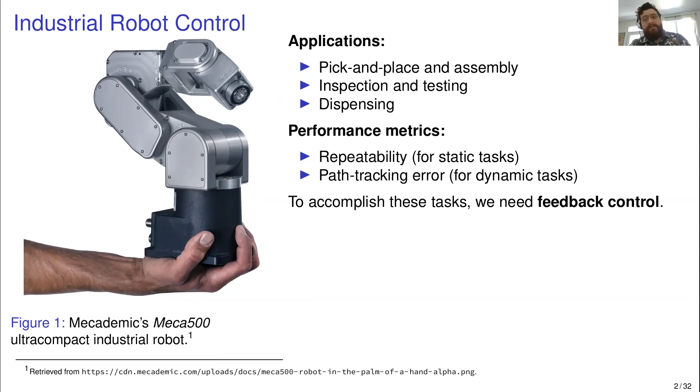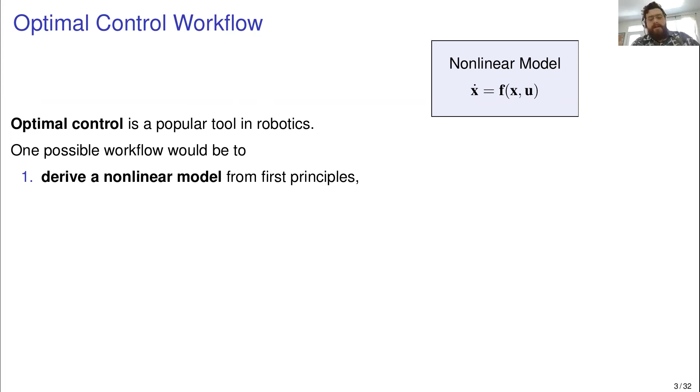So one way to do feedback control that's a very popular tool in robotics is optimal control. So in this workflow, you start with often a nonlinear model that you've derived from first principles like Newton-Euler or Lagrangian mechanics. And to actually use these tools, you need to linearize the model. So you choose an equilibrium point and you find a linear model that's valid near that equilibrium point. This is a local approximation.

And then once you have that linear model, using your A and B matrices, you can synthesize a controller by posing an optimization problem. So you would say your criteria would be, I want very low tracking error, and you want to also not overuse your control inputs. So by balancing the control effort and the path tracking error, you end up with a controller that's in this case optimal for the linearized model, but not necessarily optimal for that nonlinear model.

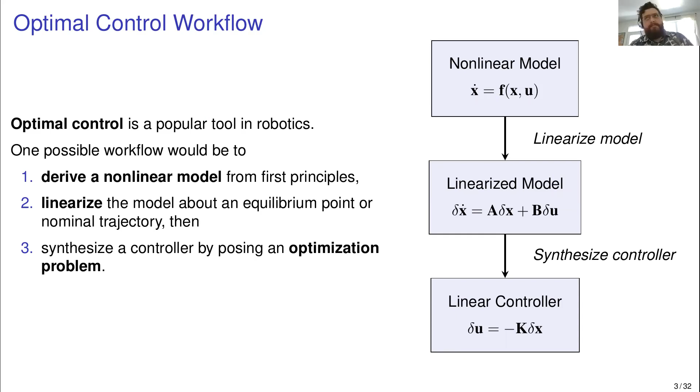So this approach has some advantages and disadvantages like everything, some trade-offs. The nice thing is that it leverages our knowledge of the dynamics. In a lot of cases, we do know a lot about how the robot behaves. So we want to use that information instead of just randomly tuning PID gains. It's also really systematic, it's easy to tune, and it helps us evaluate trade-offs.

So if you're hand tuning a PID, you might end up accidentally creating an unstable controller or making a strictly worse controller. But in this case, with optimal control, you're kind of staying at the interesting trade-offs between control effort and error. And of course, since this is a super old, well-studied field, there's lots of extensions to handle nonlinearities, either with robust control where you can treat the nonlinearities as disturbances, or with gain scheduling to do different optimal controllers at different points.

But the disadvantage here is that you rely on your knowledge of the dynamics. So if you have a bad model, you'll have a bad controller. So you could end up in a situation where just the model parameters are unknown, like inertias or damping coefficients, or you could end up with a situation like some complicated friction where the entire form of the model is unknown.

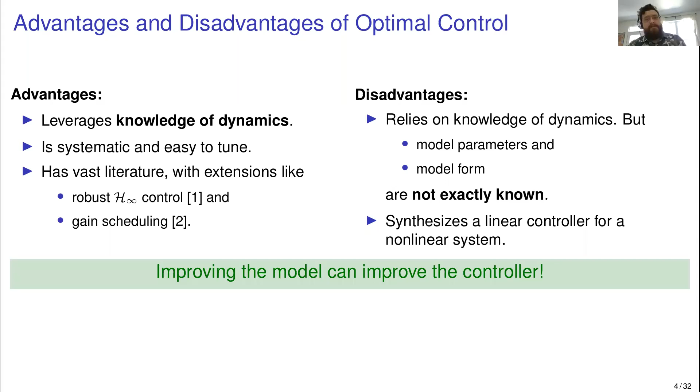The other thing here is that this synthesizes a linear controller for a nonlinear system. And so we may be leaving some performance on the table there when introducing a nonlinearity in the controller could potentially improve the performance. But the takeaway here is that if you improve the model, you can improve the controller. And so this is why we're going to start to care about using the Koopman operator to model a robot.

So in the case of the Mecademic robot, you have a robot on your desk and you want to make sure that this model that you have matches a real robot. You could, for example, just make reasonable assumptions about all the model parameters. You could assume you know the inertias from the CAD model, take damping coefficients of the gearbox from the datasheet, or you could further refine that by doing parametric system identification. So you could run the robot in a variety of poses and in a variety of paths and try and identify those parameters from data.

But if you don't have a model for some parts of it, or if for some reason you don't want to use that model, maybe it's too slow to evaluate, you could learn a complete model non-parametrically. So fit the entire thing with a neural network or a Gaussian process, for example. But there are some limitations to all of these approaches, and it's that they all learn nonlinear models, and you'll need to linearize them if you want to use optimal control. And of course, you'll still end up with a linear controller for this nonlinear system.

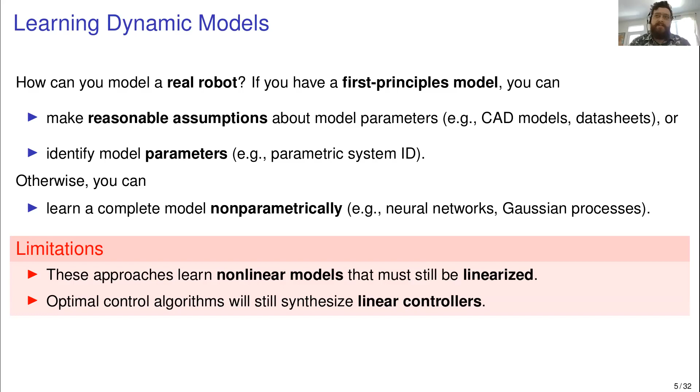And another side note is also that some of these methods, like neural networks and GPs, are really great for learning functions, but really what we want to learn here is a differential equation. And so finding a machine learning method that's kind of tuned to learning differential equations is a very interesting topic.

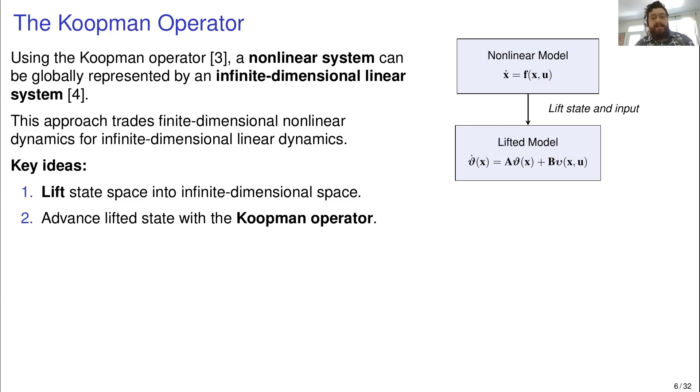So I'll start now by finally introducing the Koopman operator here. With the Koopman operator, a nonlinear system can be globally represented by an infinite dimensional linear system. So what we're doing here is we're trading finite dimensional nonlinear dynamics for infinite dimensional linear dynamics. So the kind of workflow that it might take for control here is that you lift the state space into an infinite dimensional space. You do this huge transformation, you take all kinds of nonlinear functions and you transform the state into an infinite dimensional state. The Koopman operator is responsible for basically acting like the state space model. It transitions the lifted states to the next lifted states.

Finally, you can design a controller in the lifted space that's linear using optimal control tools, and then retract, so recover that control input from the lifted controller into a nonlinear controller. So what you end up doing here is designing an optimal linear controller in the lifted space, and then bringing that back down to the original space where it's a nonlinear controller.

But I'm sure some of you are wondering what I'm talking about with this infinite dimensional system. You can't have that on a computer. You can't really work with that. So the key thing here is that we're going to use data-driven methods to approximate a finite dimensional Koopman operator. So instead of an infinite number of lifting functions, we'll maybe take 50 or 100 and see how close we can get.

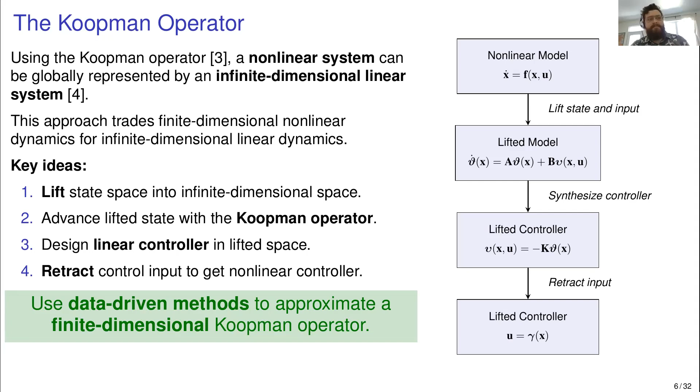So this is, warning you now, the heaviest slide in the presentation, the most mathematical, but this describes the very underlying theory of what's happening with the Koopman operator. And then we'll go into how to approximate it with data-driven methods. So if you consider this

nonlinear process, x_{k+1} = f(x_k) in equation 4, what we can do is take these lifting functions, psi, and basically any function that takes the state and spits out a scalar is a lifting function. So sine, cosine, squared, anything that gives you a scalar and takes in the state is a lifting function. And what the Koopman operator itself does is it takes these lifting functions as input and returns functions as output. So what you see in equation 5 is the Koopman operator takes the lifting function as an input.

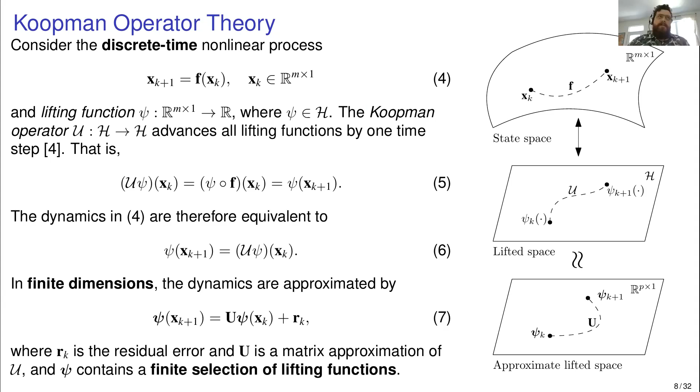Since we want to do control, we care a lot about the inputs. So we have to modify the Koopman operator just a little bit to account for that. We care to predict the states in the future, but we don't care to predict the inputs. We know the inputs already. We don't want to propagate them forward. So that's why there's the 0 here in equation 8.

The next trick that we do is we partition the lifting functions into 2 parts. The first part, theta, only depends on the state, and the second part, upsilon, can depend on the input. So we're splitting up our lifted states from our lifted inputs. And when we substitute that back into the same equation 7 from the previous slide, you see that you recover the state space over here. You have theta at the next time step equals A times theta at this time step plus B times upsilon. So this is the lifted state space equation that we get by breaking apart the Koopman matrix. So this is what we can use, this A and B, to design a linear quadratic regulator, for example.

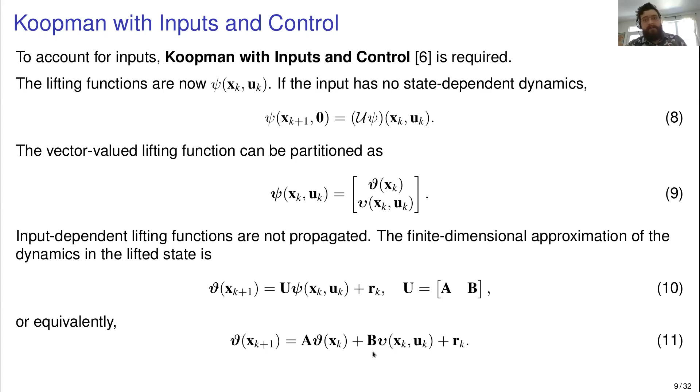So given that A and B that you find through linear regression that are both inside the U, you can do a state feedback controller in the lifted space. In 16, since theta contains all these nonlinear terms, this is actually a nonlinear controller. So this reveals the potential to do nonlinear optimal control, given that you've picked your lifting functions correctly.

On the left, you see a simple toy example with the Van der Pol oscillator. There, the orange controller is designed using a linearization of the Van der Pol oscillator, and the green one is a Koopman controller that's based on Hermite polynomials as lifting functions. So you can see the Koopman controller takes a qualitatively different path to 0 and also achieves a 20% lower LQR cost. So there's something here. If you do everything correctly, you can do some kind of nonlinear optimal control.

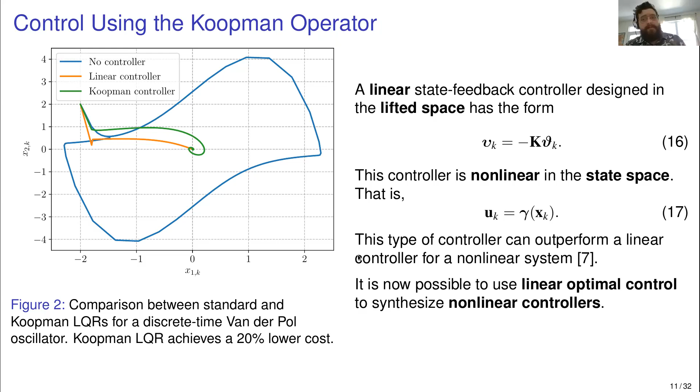I'm going to summarize the Koopman workflow again, and then we'll get into some issues and some kind of open research problems with the Koopman operator and some of the work that Professor Forbes and I have done. So the first step is, of course, to choose your lifting functions. Well, the dream is to be able to pick them as domain specific, pick things that you think will enter into your model, but it's often not quite that simple.

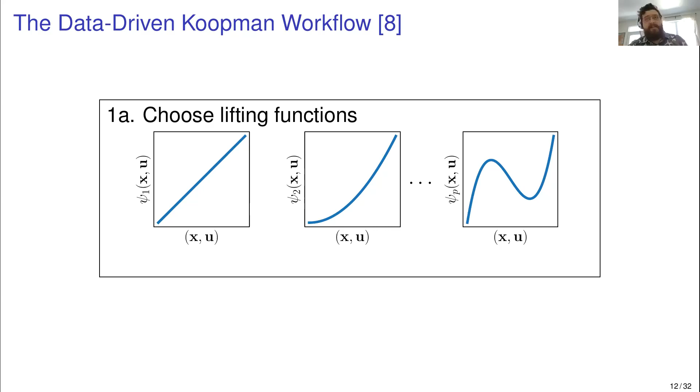You could also choose standard basis functions, like I mentioned, Hermite polynomials, monomials, sine, cosine, Fourier basis. And also a very interesting one is using time delays, so augmenting the state with shifted versions of itself. So once you have this choice of lifting functions, you also have to collect data snapshots from either a simulation or from running your robot over a bunch of trials.

You then can approximate the Koopman operator by applying all of your lifting functions to your data snapshots and solving a linear regression problem. You then have to test the predictive performance. You have to see how well or how poorly the approximated Koopman operator works. And then the problem is really that there's a manual loop here where you have to go back and refine your lifting functions to actually potentially achieve the best performance. You may not have used enough of them. You may have picked the wrong set, and so on. So there's this open problem for actually picking the lifting functions.

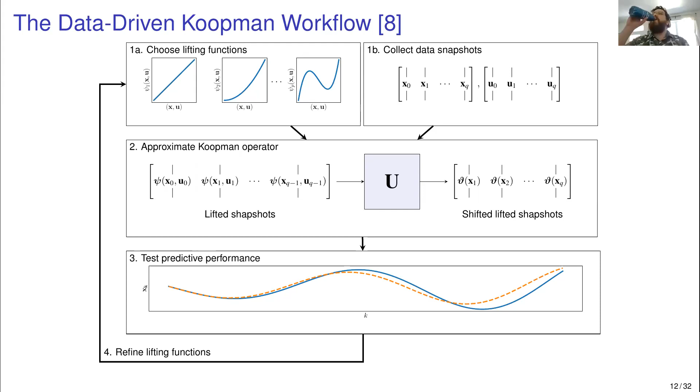So as I mentioned, choosing lifting functions is an open research problem. There's no right or wrong way to do it, or maybe there's plenty of wrong ways to do it. But the Koopman regression problem is actually very numerically challenging. Even though I said it's a simple least squares problem, it scales very badly with the number of lifting functions, and it can actually yield unstable or numerically problematic Koopman operators from situations that you would think are stable.

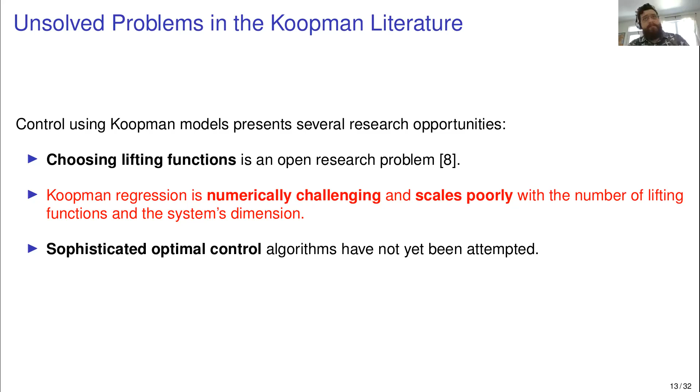There's been some interesting work doing LQR and model predictive control with the Koopman operator, but there's still a lot of interesting linear control to apply here. But the thing I'm going to talk about is the numerical challenges, because personally, that's the first roadblock I hit when trying to work with the Koopman operator. So when a lot of lifting functions are used, the least squares problem gives you an unstable Koopman operator, which is a problem because if you know your robot is asymptotically stable or it has stable dynamics, you don't want an unstable model for it.

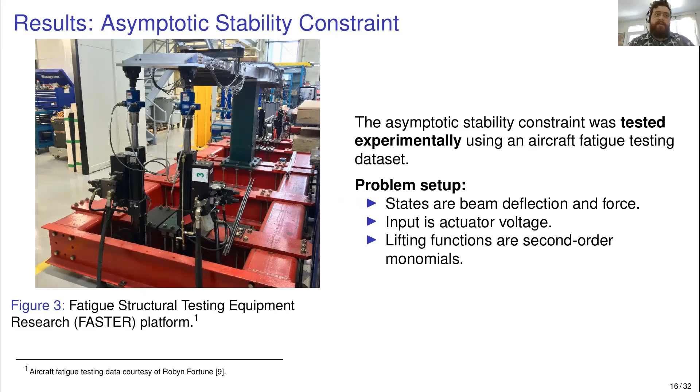And what you can see on the left is two different runs, one of them being constrained to have an asymptotic stability, just rho bar of 1, so a boundary of 1, and the other having a bound of 0.99, so a little bit conservative. And this is the tracking, this is the prediction error for the validation set.

So what you can see is the orange line is near 0, which is good for a while, and then it abruptly diverges. So there's this accumulated numerical error, and eventually it becomes effectively unstable because there's an eigenvalue too close to the unit circle. However, if you add a little bit of conservatism into that constraint, the blue line, which has the slightly tighter restriction on it, stays stable for the entire time.

So if you look on the right, you can see the eigenvalues. There's one orange one really close to the unit circle, but if you adjust the constraint very slightly and you push back the eigenvalues very slightly, that's the difference between an unusable model and a usable model in this case. It's a very small difference, but the orange model is really not good for prediction. I wouldn't use it personally, but the blue one is much more well-behaved for a very small change.

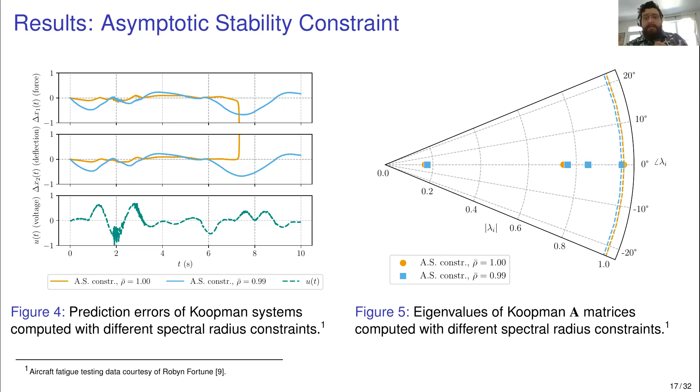So that looks good for the asymptotic stability constraint. But I'm going to show you what I think is an even better approach here. Just a moment. There we go.

So like I was talking about system properties before, you can actually think of the Koopman system as an LTI system, and that has a frequency response, it has a gain. So what if we regularize by penalizing the gain of the system and not by penalizing the size of its state space matrices? So that's what we do here. We use a system norm as a regularizer so that the system's gain is penalized instead of U. So we're saying we want a U that fits the data well, but the system can't have crazy high gain.

And so that's what's expressed by the H infinity norm here of G. And so this is the state space system represented by A and B from the Koopman operator. And in this case, C and D are just identity and 0. So the nice thing here is that this is actually stable for any alpha, because if a system has a finite H infinity gain, then you know that it is actually asymptotically stable.

So I'll just go on a little bit of an aside here to solidify the H infinity norm for those of you who don't know. The simplest way to think of it is the peak of the Bode plot, the peak of the frequency response. This system over here, the magnitude plot, the H infinity norm is that peak there. So you can think of it as the worst case gain over all inputs.

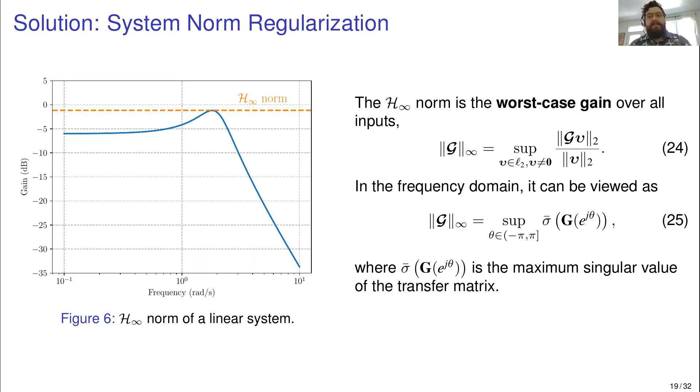So we tested this on an underactuated robot from the University of Michigan. And what this soft robot is doing is it's pointing a laser pointer at this platform here, at this board. And the states are the X and Y position of the laser pointer. The inputs are 3 pressure regulator voltages. And in this case, we had third order monomials as lifting functions with 1 time delay.

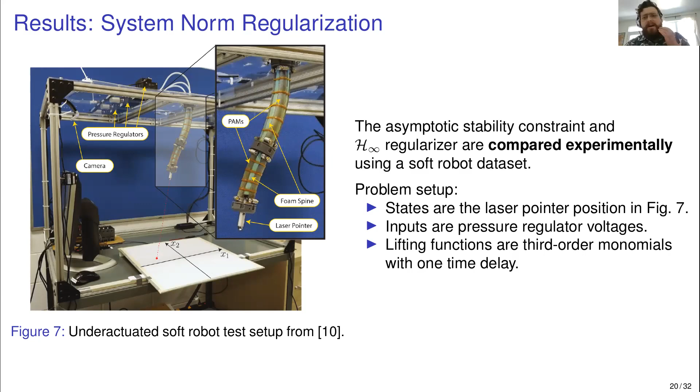So what that means is you take all the states and inputs, you shift them by one and add them in, and then you take all third order combinations of all of that. So that leads to 100 or 200 lifting functions. So it's quite large. So I'm jumping right to the end of the performance here, just so you can see what this looks like in time domain before we take a deeper dive into the properties of these different Koopman operators.

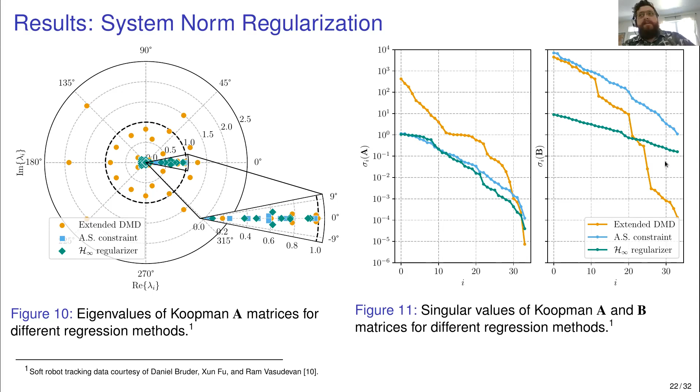However, if you look at the H-infinity regularizer, which considers the system as a whole, not just the different parts, you see that the green line on both of them is, in this case, under 1 and under 10. So it's much more reasonable numerical conditioning there.

Another way to look at this is to look at the frequency response of the systems. So you see that the gain is very high for the linear system, and it's got this weird peak as well at a random frequency. Constraining the asymptotic stability doesn't even help with the gain. The gain is still very high. But if you use the H-infinity regularizer to push down on this gain, you see that it's much lower, and again gives very similar, if not better, performance.

The cool thing, if you know anything about H-infinity control, is you can use some of the tricks from control in regularization. So over here, we can actually weight the norm. This blue dashed line that uses the right axis is a weighting function. So what we're doing over here is we're saying, I want to penalize, oops, I shouldn't have clicked.

I want to penalize gain at high frequencies because I don't trust the data at high frequencies. And I don't want to penalize low frequencies so much because I do trust the data more there. So you're kind of expressing in what frequency band you trust the data more or less. And so then you can see the impact on the frequency response is that it has a higher gain at lower frequencies and a lower gain at these high frequencies.

And so if we flip back to the original plot here, the difference isn't that drastic in this scenario, but what we're actually doing is trading a little bit of standard deviation for a slightly better mean. In this case, they're quite similar, but the ability to actually weight the system using a system norm and not just a matrix norm, and even be able to adjust where you trust the data and where you trust the lifting functions is a really cool contribution, I find.

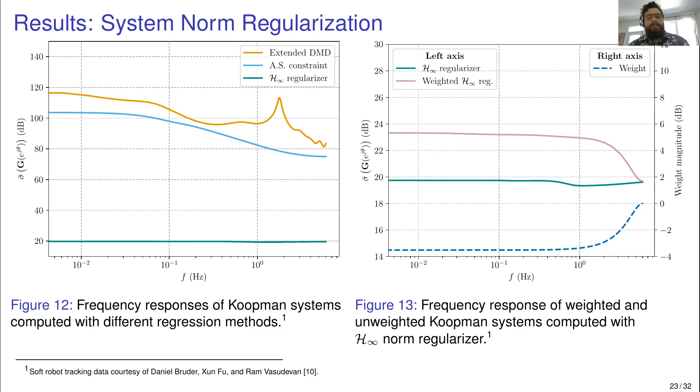So for those of you who are a bit more code oriented, this is your time. Through all of this, we came across a lot of problems actually implementing some of this stuff. The biggest thing is that Koopman has a lot of bookkeeping, and it has a lot of bookkeeping that is not super well supported by machine learning libraries that are focused on learning functions, but we want to learn time series. So one of the things is composing lifting functions. You need to track the ordering to keep all the inputs at the bottom. You need to make sure that you know where all the inputs are so that you can undo them.

So pykoop, which is our library, our open source Koopman library, lets you basically make a list of lifting functions and it'll compose them for you. And it introduces scikit-learn compatibility to let you cross-validate over different lifting functions and over different regression parameters. So what this looks like, the simplest case is just that you create a Koopman pipeline object. This all follows the scikit-learn conventions.

Then you have this list of lifting functions here. In this case, there's a polynomial lifting function of order 2. And then you can specify your regressor over here. Once you've done that, you can fit the pipeline, giving it the number of inputs, same as scikit-learn. And then you can use that to predict. You can use the fit model to predict on new data.

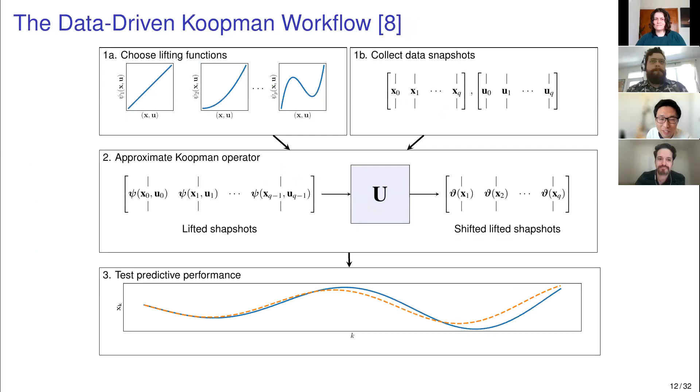Thank you. I have another question related to your motivating example where you have 2 states extended into 3 states. For that particular example, if one implemented this scheme, the first state in the extended state has a relation with the 3rd state. When we apply this technique, do we need to check the relation between the 1st state and the 3rd state, or is it treated as an independent state?

So that's an interesting question, and the fun thing is that there are 2 ways to propagate and predict using the Koopman operator. One way is to start with your initial condition, which has to be valid, so the x0 and the x0 squared have to be consistent. Then you keep multiplying by the Koopman operator to advance the state. So that's not guaranteed to keep the relationship between the 1st and 3rd state.

However, there's another way where you multiply by the Koopman operator, extract out the first 2 states, and then relift, so that between every multiplication you're guaranteeing that the relationship between the first 2 states and the 3rd state holds. Those are 2 different metrics for different applications. The latter is more useful for control because that's how it would happen in a real system: you would measure sensor inputs and lift them every time.

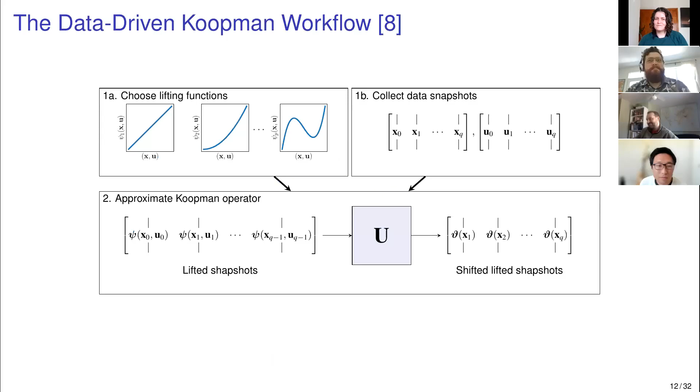The issue is when we add on the H-infinity norm, both A and P are unknown here, which means this becomes a bilinear problem. So it's non-convex, and the way we solve this is by solving half of it with A fixed, then resolving it with P fixed, going back and forth and iterating. But it can take quite a long time for large systems with many lifting functions. So there's nothing for free here. But I would argue that it still takes less time than running your hyperparameter optimization for days. Thank you. Thanks.